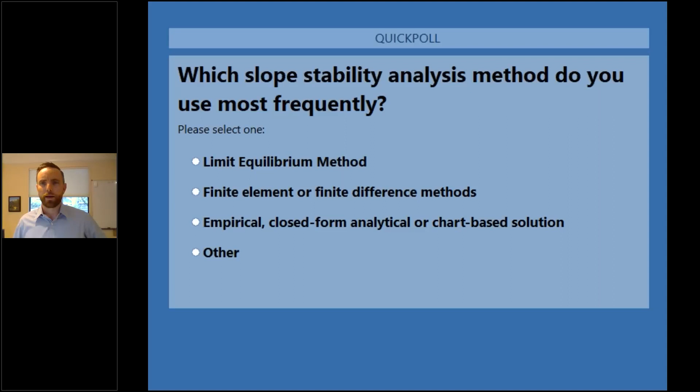And we'll advance it to the next question. Okay, thanks. So we got close to 80% of the people selecting that they use the limit equilibrium method most frequently, and then another 15% some type of continuum numerical modeling. So that's good. What I'm going to talk about today is directly applicable to the first method there, but as you'll see from our software presentations, it's also broadly applicable across any analysis method.

All right, we'll go to the next one here. What type of slope stability analysis do you use most commonly? 2-dimensional, 3-dimensional, or one of the other options there?

All right, good, thank you for voting quickly there. We got 95% of people saying they're doing 2D. So we're still seeing a relatively small percentage of analyses done in 3D. We got one person doing 5D analyses, so we'll look forward to hearing from you on the details of that during the Q&A session.

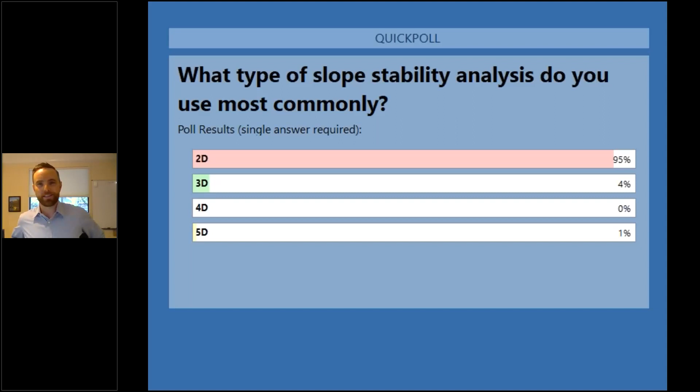Okay, 2 more questions, hang with us here. What methods of slope stabilization do you commonly design or construct on your projects? I believe you can select more than one option here. So whether you're an engineer doing design or you are out building these things or involved in the field, which are you most commonly implementing?

All right, so it looks like we got a fairly even split between a little bit of everything, all these technologies being implemented, and then even something else, other. Okay good, so that's informative.

And then the final question is related directly to what I'm going to talk about, and the answers are a little wordy, so bear with me. When you're doing limit equilibrium method analysis, which most of you indicated is what you're commonly doing, how do you represent deep foundation resistance in the model? So you can go ahead and read through each of those and select the one that's most appropriate, or choose other.

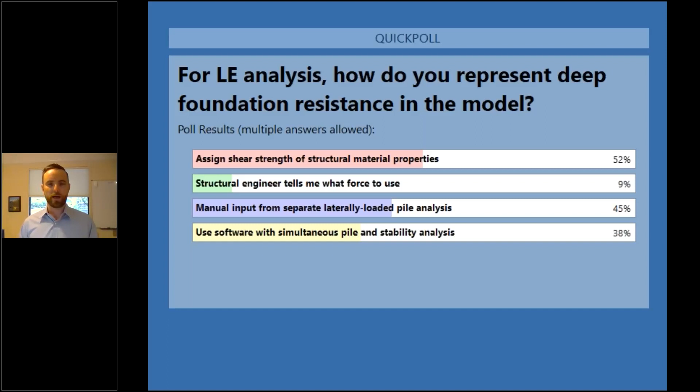Slightly more than half of you indicated that you are assigning the shear strength of the structural material, be it concrete or steel, directly to some slice in the model or some geometric zone. You could select more than one option here. About half of you are saying you manually input it from a separate laterally loaded pile analysis. Some of you are relying on the structural engineer for guidance, and close to 40% are using software that can do the slope stability analysis and a pile analysis simultaneously. That was the last poll question, and I think this information will be useful for our software vendors and for all of us on the organizing committee. Thank you for that input.

My presentation is called Incorporating Deep Foundations in Limit Equilibrium Slope Stability Analysis, AKA do not apply pile shear strength to material zones. That's a little tongue in cheek, but directly related to the last poll question. What I hope to highlight today is that this can often be an erroneous method of approaching a slope stability analysis that includes deep foundations, because it doesn't address the true mechanism that might develop. I'm going to explain how to identify that mechanism and correctly implement the force, and then our software vendors will explain how they did this for our example problem with their respective software packages.

My presentation is broken into two parts. I'll talk about the fundamental mechanics of the deep foundation resisting elements, which I'll refer to generically as piles—it could be a driven pile, a drilled shaft, or some other novel deep foundation element. Then I'll explain the problem statement given to the software vendors and the baseline information, so each of them doesn't have to spend too much time going through it.

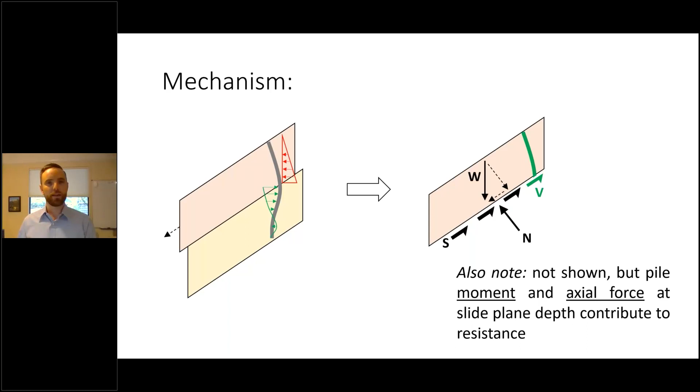I also want to point out that I'm only showing shear, and I'll talk about the mobilized shear force during this presentation. But what's not shown, and what you know from analyzing piles, is that if you make a cut, there's also an axial force in the pile at that depth if there's a component of vertical ground motion, and there's a moment. The same principles I'll discuss apply to those forces, which can and should be included in the slope stability analysis when computing force or moment equilibrium. But we're going to focus on the shear force here today.

So that's the shear force by inspection that acts on the free body diagram. The question is, what is the value of that shear force, the appropriate value to use in a slope stability analysis?

When you're doing limit equilibrium slope stability analysis, by definition, all components of the system are at a limit state. That's what limit means in limit equilibrium, meaning they have provided or mobilized their full available strength. For the ground, for example, it's at its shear strength. We don't directly consider the amount of strain it takes to get to that point; we just assign the shear strength as a stress or a force.

Likewise, when you incorporate a pile into a limit equilibrium slope stability analysis, my opinion is that the resisting force should be representative of a pile-soil interaction limit state.

Now there's a few caveats related to how we combine a factor of safety with the slope stability analysis and apply that also to the pile resistance. When the pile's at a limit state, you could choose to apply a resistance factor or a factor of safety, depending on what design framework you're working in—allowable stress design or LRFD—to that resisting force before you bring it into the slope stability analysis. Or you could allow the slope stability program to apply the same factor of safety that it applies to the geomaterials to the pile. That choice is yours as a designer. It can be handled either way, you just need to be aware of what you're doing.

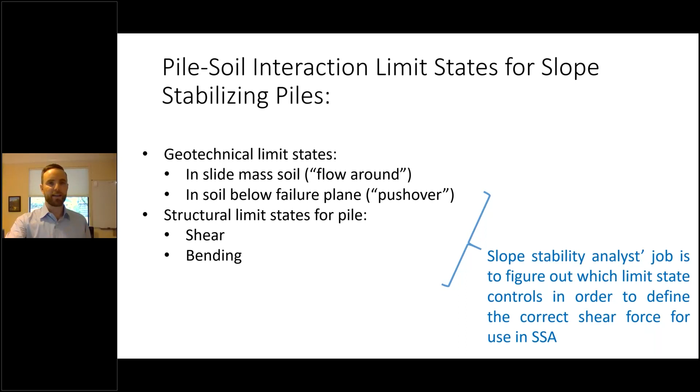So your job as the slope stability analyst or engineer doing this analysis is to figure out which limit state controls in order to define the appropriate force to implement back in the slope stability analysis. Let's look at each one in more detail and determine how you would identify whether a particular one is the controlling mechanism.

The first is the so-called flow-around failure. There's a maximum amount of load or stress that the moving ground can transfer into the pile before essentially a passive wedge or mechanism develops, and there's not going to be any more load transfer—the soil's just going to flow around, as the name implies.

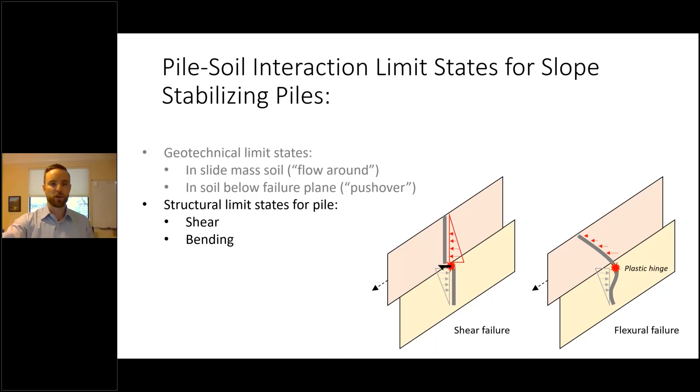The motivation for this presentation is that a method commonly employed, that I've seen over and over again, is that people jump straight to assigning the structural shear strength of the pile element as the resisting force. For example, say we're talking about a reinforced concrete drilled shaft. You could take the shear strength of the concrete, multiply it by the cross-sectional area of the shaft, and say that's its shear resistance, maybe adding in some shear strength of the reinforcement as well.

Or if it's steel, you take the cross-sectional area of something like a steel pipe or an H-pile, multiply it by its shear strength, that gives you a force. If you implement that in the slope stability analysis, you are implying that that's the mechanism that develops first before any of these others do. As you'll see in the next slides and in our software example, that's unlikely to be true for the vast majority of cases. It would be incorrect to do that, and potentially a drastic overestimate of the amount of available resistance, overestimating the factor of safety or stability of your slope if you use this method.

So let's dig a little deeper and question: is it possible to get a pile shear failure before one of these other mechanisms develops for typical conditions? If we have a shallow depth of sliding, particularly in soil, the maximum load imparted from the moving ground against the pile is unlikely to be enough to shear through the pile, basically.

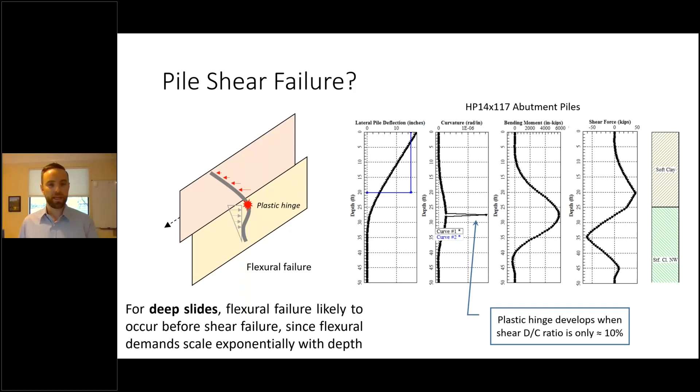Okay, so here's what I would propose is an appropriate method for determining the amount of resistance to incorporate back in your slope stability analysis. The bottom line is you have to do, one way or another, a laterally loaded pile analysis.

So one way to do that, if you use a limited equilibrium slope stability program that doesn't have that functionality built in, is to do a separate laterally loaded pile analysis, for example using LPile or equivalent software, where you make a model that matches the ground conditions. You've identified a depth of sliding from your slope stability analysis that you want to evaluate, and you set up a model like that, which you'll see in our software vendor examples.

And you displace the ground relative to the pile, and you track the mobilized shear resistance, but you're also looking to identify which mechanism is realized first.

So these next series of slides basically just detail the same thing I've already explained. You'll have these slides as a reference for how to go through this process in more detail.

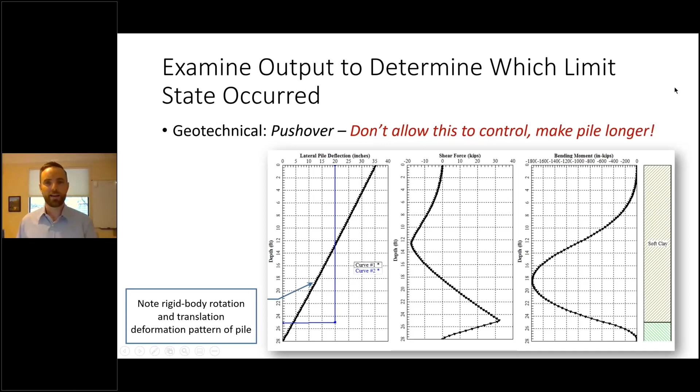Essentially, you're just going to track if each one of these mechanisms develops. Do you have a flow around failure? Do you have a pushover failure, as exhibited here by this rigid body rotation that goes to a large displacement? In that case, just make the pile longer. If this is occurring, you shouldn't let it—you should just make the pile longer. So that's an easy fix.

Or are you getting a structural failure, which of course requires you to have knowledge of the nominal moment and shear strengths of the section? So there's no way to do this without doing the laterally loaded pile analysis and also having an actual trial pile design in mind from which you can calculate its structural strength. There's no way to do it otherwise.

So if you're thinking you can do this purely in the geotech world, as in the slope stability software, unfortunately you can't. You need to work collaboratively with a structural designer, or have that capability yourself.

Okay, just to really point out a few more things that would be incorrect ways of doing this. If you draw zones in your model geometry that represent the pile, and you assign to that slice the structural shear strength of the pile material—like, for example, if it's concrete, and you make a Mohr Coulomb model where the cohesion is set to 5,000 PSI because that's the strength of your concrete—you are not doing this correctly, because limited equilibrium slope stability software is not set up to do a lateral pile-soil interaction analysis.

So you might think you're doing it right, but basically you're skipping that part of the analysis, and could be off by a big margin.

I'll say that a lot of slope stability software—essentially all of it, in my experience, all the different programs that are available—give you a way to directly input the structural shear strength of a pile. And in that regard, I won't say they're misleading, because all programs require the user to understand what they're doing, but they sure make it easy to do this in what I'm describing as the wrong way, to just input the shear strength of the material.

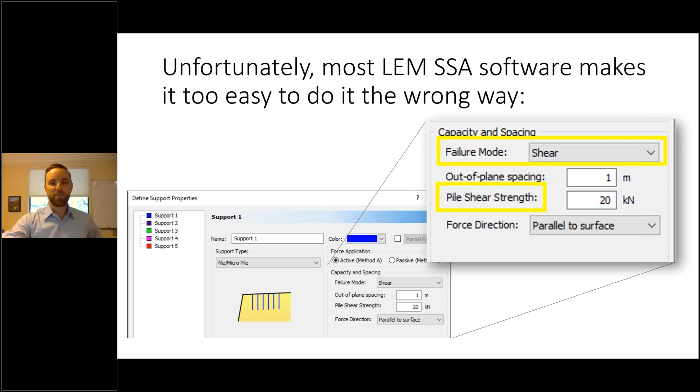So be wary of that, and be aware that you need to perform a separate analysis to determine what that force is. Even though I've been talking about limited equilibrium analysis, you don't get off easy just because you go to a continuum numerical modeling approach.

The same thing applies. You can't simply define zones of geometry and then assign a constitutive model that represents concrete or steel, for example, to those zones and think that you're done.

You have to take care to set up your numerical model in a way that actually represents the pile-soil interaction. Typically, that's going to mean you need to implement structural beam column elements to represent a pile, and also define the interface between the pile and the ground to make sure you're capturing that interaction behavior. So you don't get off easy by just going to that type of analysis.

Okay, some final thoughts to wrap up the mechanics part of this presentation. The bottom line is that shear failure is unlikely to occur prior to a flow-around or flexural failure in most of the scenarios I've looked at. It is possible to get a shear failure in a pile, particularly if you're going through rock where the slide plane is between boundaries of rock, like a bedding plane of a sedimentary deposit—you can shear through a pile before failing it in flexure. But for the vast majority of cases, it's usually wrong, and therefore unconservative, to apply the pile shear strength to material zones in slope stability analysis.

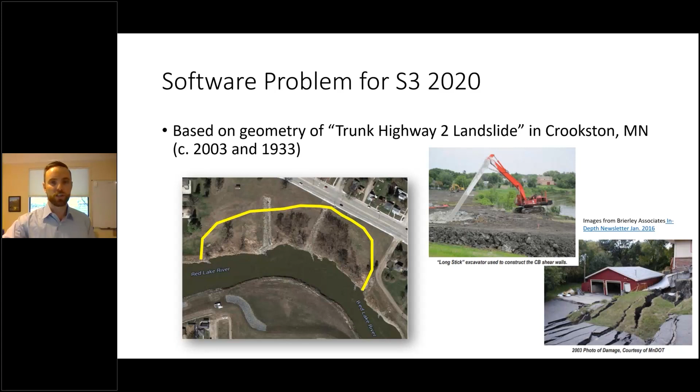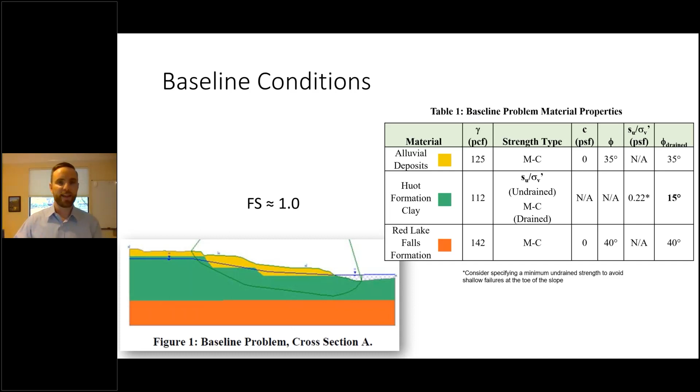For the problem at hand, we didn't include any changes to the ground surface elevation or changes in water levels, so it's that long-term drained property that applies. It's also worth pointing out that we provided a simple hydrostatic groundwater surface, even though in the real landslide, as detailed in the Barr report, artesian groundwater conditions and a rapid drawdown of the river level were actually attributed to the landslide. But we simplified that because we're not diving into the details of water in slopes.

Here are the prompts that the software providers were asked to respond to in their presentation. The first one is just to identify what factor of safety they computed for the existing conditions, to make sure we're all at the same starting point.

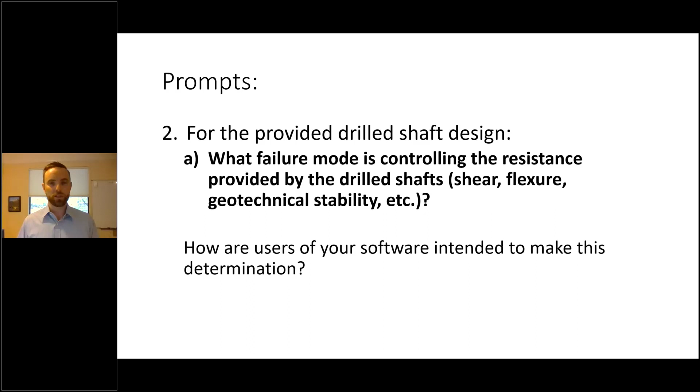The second one is we wanted them to identify what failure mode is controlling the resistance provided by the drilled shafts - shear, flexure, or geotechnical stability. We want them to identify what controls, and then tell us as users or potential users of the software how they made that determination. That was part 2A, and the remaining ones are more nuanced and relate to the subjects they'll go into detail about.

So what is the computed stabilized factor of safety with the drilled shafts as specified? What are the demands on the drilled shafts that should be used for structural design - shear, moment, and axial demands? Part D: what amount of slope displacement is anticipated for the safety factor computed in part B?

So if you're telling me the safety factor is 1.4, what displacement goes along with that, and what is the meaning of that displacement? And then the last part: what amount of slope displacement is actually anticipated? If I go out there and build these drilled shafts like I just showed, how much is the ground actually expected to move?

And then I weighed in here with my own opinion - for example, in the context of a limit equilibrium analysis, this might be associated with a factor of safety of 1.0, or referred to in the context of 'service level displacements.' So you'll hear more discussion of that from the providers.

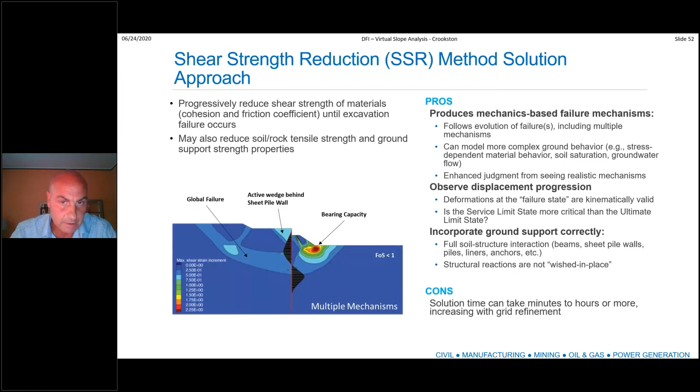In terms of mesh generation, again, Flac3D comes with an extruder. It's very simple—you just import a background image, decide what mesh density you want, and in less than a minute you have the mesh. There are other options, but I'm not going to talk about those for more complex geometry right now.

Okay, this is enough—we already shown this section. Let's get started with the analysis.

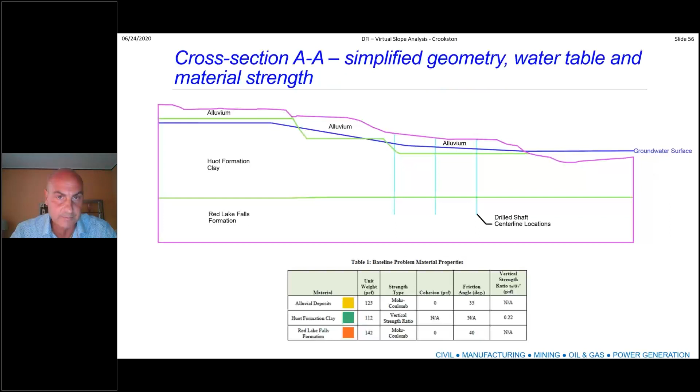This is just a summary of what Ben has already shown—material property and geometry.

One decision we have to make, especially in this circumstance, is that we have to start imposing a stress and do a back analysis to bring the slope into a failure condition. So we have to decide if we are basing our analysis on the post-failure geometry or pre-failure geometry. I decided to concentrate on the post-failure geometry. It provides a slightly different shear failure location, especially close to the highway, but for the purpose of this exercise, I decided to stay with this one.

In terms of constitutive model, I use Mohr-Coulomb for the clay and the upper sand, and plastic hardening for the till. This is the water table location, and this arrow that you see is just the total pressure applied at the bottom of the river.

In every numerical model, we have to initialize the stress in such a way that the model can reach equilibrium. In this case, for example, I applied an undrained shear strength of 0.25 sigma prime V with a minimum of 15 kilopascal. Otherwise, we would have seen a local mechanism that is meaningless.

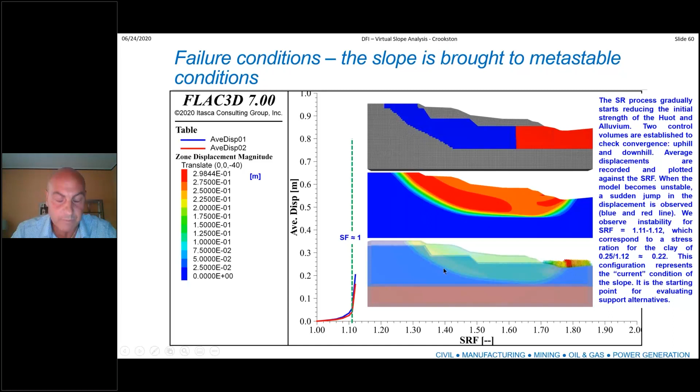Now we have brought the model into a metastable condition, which represents the situation before installing any type of support. Now we are ready to install the support, and this is the first solution, the basic solution that Ben described.

So we have the three drill shafts on the left, the alternative with embedded pile, and on the right, the alternative with 3D solid piles. I also included all the reinforcement inside the steel cages, in terms of longitudinal bars and also the spirals. Now, what do we get?

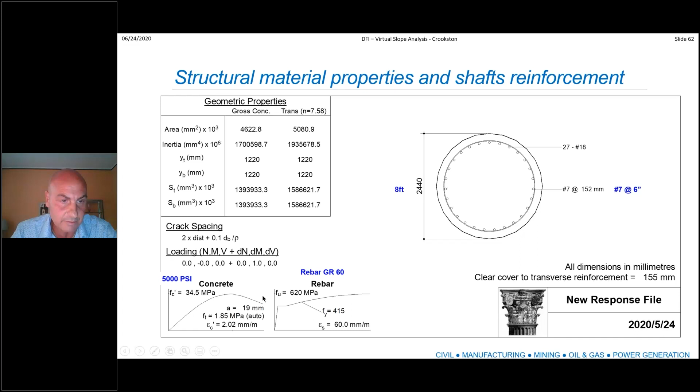This is just a cross-section representation of the structural layout with the constitutive model for the material in terms of concrete and steel. I'm not going to talk about this in detail. What the sectional analysis gives us are usually three aspects.

One is the thrust-bending diagram. Second is the moment curvature, and third is the axial-shear diagram. All of this nonlinear behavior has been implemented inside FLAC3D.

So while the strength reduction process goes, we know when we reach cracking in the pile, we know when we get into ultimate failure, and we know if we have shear failure or bending moment failure, and we also know what type of geotechnical failure, if any, would develop during the process. So essentially, we have the full picture combined together in the model.

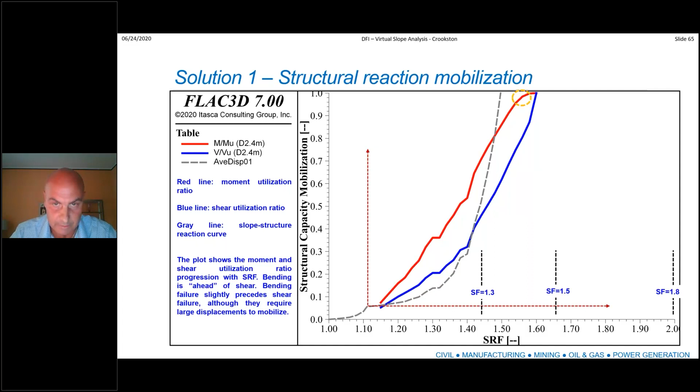But again, at safety factor 1.5, we have the full structural mobilization in terms of steel capacity and also concrete capacity. You can read in more detail below that slide. Okay, this is showing the mechanism for the pile in this case.

Next one should be a short video. Hopefully I can get it started. That would show how the mechanism would develop.

If you follow the blue and the red line, that shows the mobilization of the displacement for the slope. You see that the lower part is gone at around 1.3 something, and the blue line keeps going because that is the portion of the slope that is pushing against the pile. You see how this pile is displacing until we get the structural failure. Note that below 1.5 we have a displacement that is higher, if you look at the red portion of the picture.

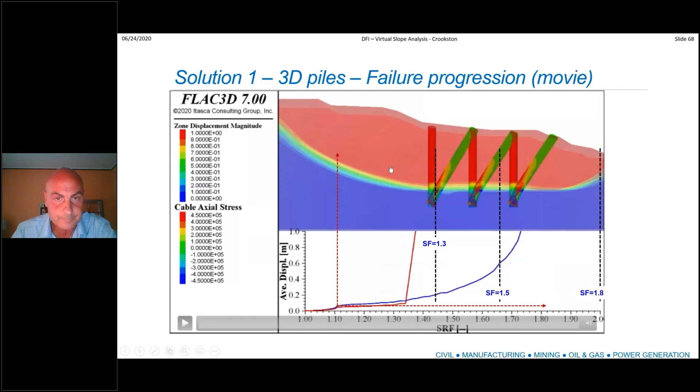Next, let's see what happens if we embed the piles 4 diameters instead of 2. We get a little bit better performance, but not really much. We still are not able to get to 1.5, and the displacement is still significant. So this is certainly a solution, but it's still based on a cantilever system.

Now we are embedding more, and so obviously what I would expect is to have an even more pronounced gap between the bending mobilization and the shear mobilization. This is actually what happened. If you remember, with the 2 diameter embedding, the red and blue lines were kind of traveling together, while the longer the embedment, the higher the bending mobilization is.

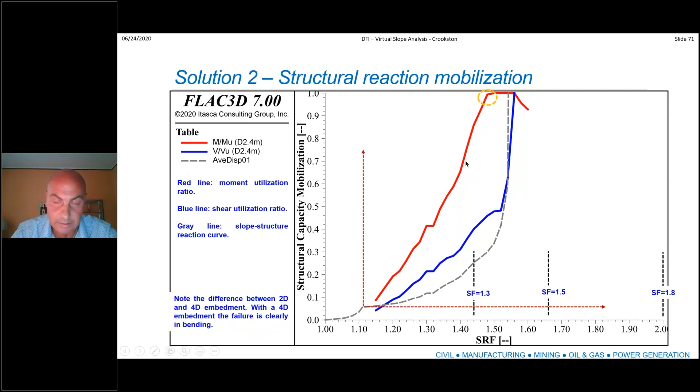What would happen instead if we change the static configuration, like for example, adding a top beam? So instead of relying on a cantilever cross section only, we would transform the support into a frame. This is highly beneficial. We are reducing the displacement significantly. We are also changing where the bending moment and the maximum bending capacity or demand is localized. Now it's at the top, close to the beam, which can be accessed much more easily than having a plastic hinge down at the bottom, and we can go up to 1.5 with a displacement that is still probably acceptable for a state limit.

Obviously, it doesn't solve this situation. This is a point that I want to make. Sometimes I've seen people say, okay, I don't care about this mechanism, I'm going to ignore it, and just put a high cohesion or something like that. In reality, it is like putting in ground improvement. We will see that taking care of this wedge in the other solution is actually improving the performance of the slope as well. So everything is kind of cooperating together. Multiple mechanisms and structural organization must be analyzed together.

This is just the curve of the displacement and the deformed shape at failure. The failure is in bending again, and it is located at the top connection with the beam.

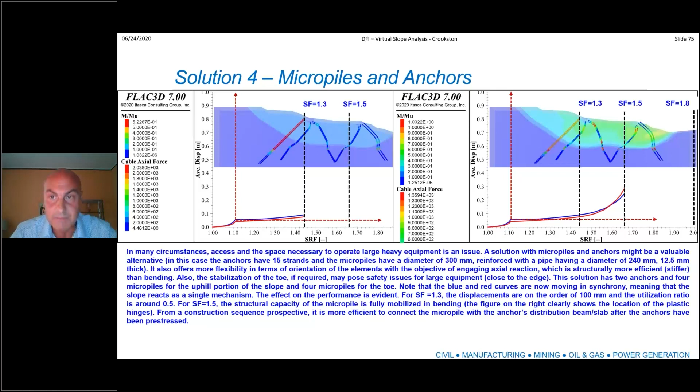It's not always possible to do this type of approach. Here, bonding, the bond and the ground bond, becomes a significant issue. So the control and execution also become important. But just to show the difference in terms of performance that you can get switching from drill shaft, in this case cantilever, to adding a top beam, or to switching completely toward axial control type of mechanism, we can go above 1.6 or even higher.

Finally, and I'm almost done, of course the mechanism here in terms of structural behavior is controlled by bending. The micropile will break in bending. The shear here, the green line, is almost not even registered.

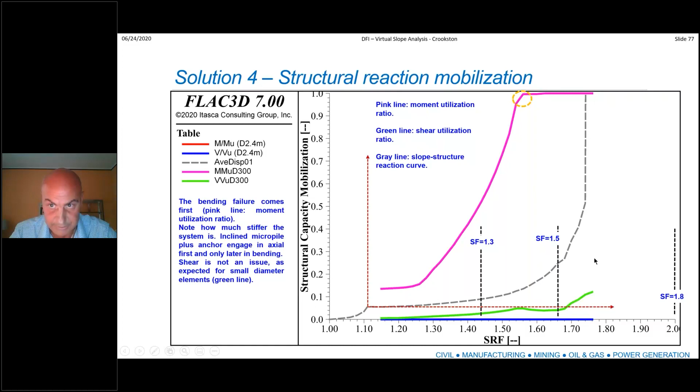Just for your information, these are the properties of the micropile that I've used. I don't need to get into this detail, we can quickly move forward.

This is a combination of different systems. I kept the drill shaft here, and also put micropile here as support and anchors in the situation. So this is a mix of different types of approach.

Try to block the head of the drill shaft instead of leaving it as a cantilever, having a system that can control the horizontal deformation. This actually works pretty good and seems to be the best one, and would allow also optimizing the diameter of the drill shaft.

I didn't do that because of time, but in theory, this solution would allow for reducing the diameter and the reinforcement of the drill shaft.

We see that we can easily get a safety factor of 1.8 with this one, and still the performance is very desirable, because we are talking about only a few inches of displacement.

Finally, since I did also the analysis for the shear wall, I was curious to see where the shear wall solution stands in this situation.

Consider that this approach is based on undrained shear strength, and for the design I didn't use the undrained shear strength, but an effective stress approach that I will mention a little bit later.

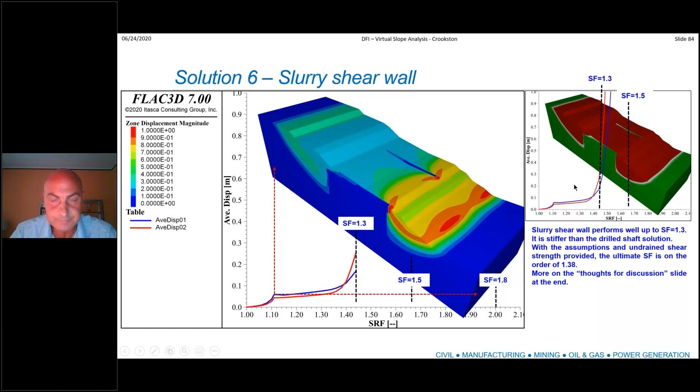As Ben was mentioning, the shear mechanism is brittle. We get a better performance before we get to failure, but once it fails, it goes pretty fast.

Finally, I guess it's important to summarize in such a way - this is a kind of busy chart, but bear with me for a second - this is the summary of all the solutions that have been analyzed in a single chart. It's kind of easy to track what we want to get and what is the best solution we can implement.

Considering the safety factor, which is only a number and usually doesn't really represent the whole system if we don't associate a level of displacement to it, a level of performance. A safety factor means we know only the final point, but we don't know how to get from point A to point B and what happened to our support system along the path.

So, for example, if we fix 300 millimeters, a foot of displacement, as a maximum displacement that we can tolerate, and we wanted to have a safety factor of 1.5, we see that none of the solutions based on piles, and even the shear wall with this situation, would satisfy this requirement.

We need to put at least a capping beam at the top, or a similar system, and try to control the head displacement. Even with a closer view close to the origin, if we want to go into a service limit state...

we see that all the piles, including the 2D analysis, are kind of moving in parallel at relatively low displacement. We see that the shear wall is stiffer, obviously, in this situation, but the solutions with axial mechanism are performing better than the others.

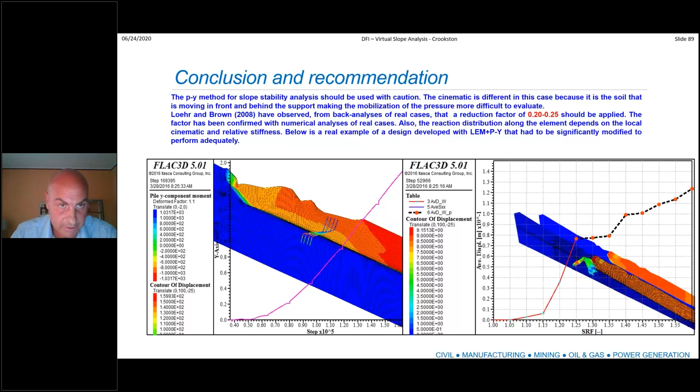Now I want to discuss the limitation of the general approach. I'm struggling to understand the physics of reducing the strength below a minimum value, like the normal consolidation value or the residual strength. There must be a limit in terms of strength reduction below which it doesn't make sense to keep reducing. Here we were already in normal condition, so how can the strength be much lower than that? It could go from 0.22 to 0.20 or 0.18, and that's fine, but it certainly cannot go down to 0.10.

So all approaches probably need to be rethought and reconsidered. This is why I tend to use an effective stress approach, because I think it is more appropriate for this type of slow movement and stability analysis.

In this case we had good data from a triaxial test. You see this graph on the right - the red dots illustrate the peak strength, and the blue dots the residual strength. Without doing any fancy math, I drew a gray line representing the peak condition or undisturbed shear strength, and a very conservative assumption for the minimum residual strength, which I assume as the design shear strength.

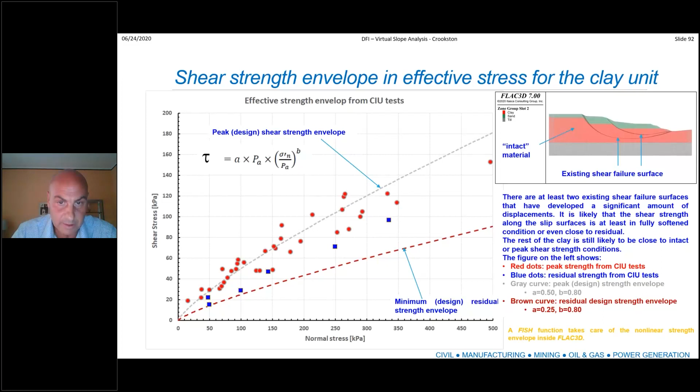This is exactly what I did: start with a model initially in equilibrium, reduce the strength only on the existing slip surface, and the failure happens for a shear envelope very close to the residual - and 0.28, 0.25 is pretty much the same number. So we have these two sliding slip surfaces at residual, and you see this jump in displacement representing failure.

At this point we install the support and keep reducing the analysis - reducing the strength everywhere now, all the way down to residual in the slip surface, and also in the till formation and in the top sand.

Here's what we get: the global strength reduction can travel all the way to residual, and we have a mobilization of 0.44, close to 0.5, which in my opinion means we have already applied a safety factor of 2 on the geotechnical side, and a safety factor of 2 on the structural side in terms of bending moment. We already know the shear doesn't come before the bending in this configuration.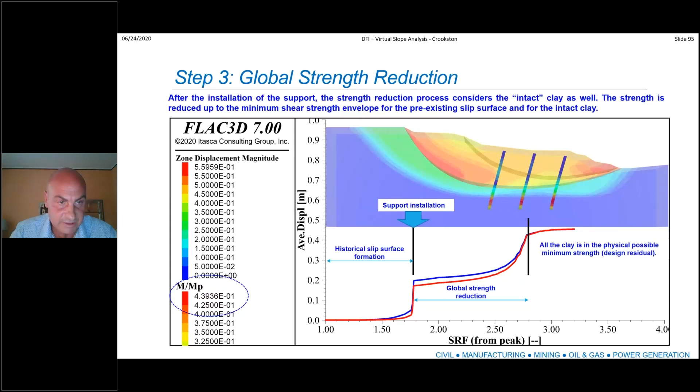So what I'm trying to say with this approach is that sometimes just relying on drained shear strength and reducing it to values that are not physically possible can produce unrealistic designs.

I did the same exercise, a two-way conservative design, with the shear walls, getting very similar results. What I'm showing here is the formation of tension and shear bands - mostly shear here and tension on this side. But again, we have a safety factor of 2 in comparison to the residual strength.

I guess I'm approaching the end. This is the method I tend to use all the time when I have a pre-existing slide: trigger the residual strength or close to it. If you don't have data, Professor Stark's correlations can provide initial information to determine the A and B parameters for fully softened and residual strength. Then install the support and reduce the strength.

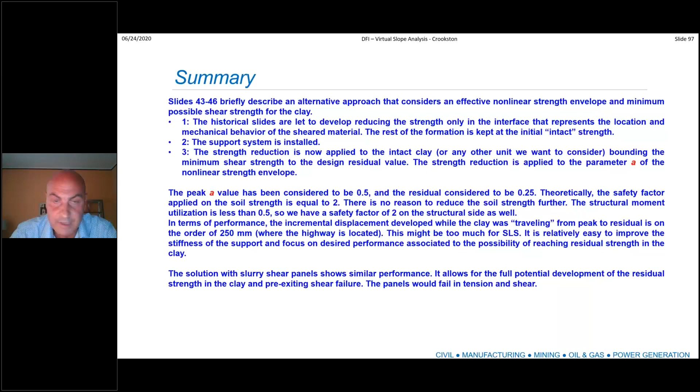Once you are at the lower limit, you can still play with other problems like water table or creep, or any other phenomenon that you think may happen, in order to evaluate the performance of your system. And that's the end - thank you for your attention.

All right, thank you, Augusto. Lots of detail in there. Just a reminder that the slides will be provided as a PDF, and certainly the presentation we just saw will be a valuable resource to revisit. Lots of extra commentary and discussion on the details there from Augusto was included on the slides. I think also he made some sage points about the relationship between factor of safety and displacement or performance, and that it can be misleading to just think about slope performance in terms of a factor of safety, which is, after all, a number that represents a theoretical condition that doesn't actually occur.

Okay, our next presentation is from Dr. Gary Gregory, and we'll see a different approach of looking at this same problem. Professor, go ahead.

Well, thanks everyone for joining us today. My presentation is based on a combination of limit equilibrium and P-Y analysis, using my slope stability program GEOSTASE and Ensoft's lateral pile analysis program LPILE. This is a very simple and rational approach that is well within the capability of most geotechnical offices with experienced geotechnical engineers, and it's worked well for me over the years. I'll also have a technical memorandum covering more details that I can provide, and perhaps it will be included with the PDF later.

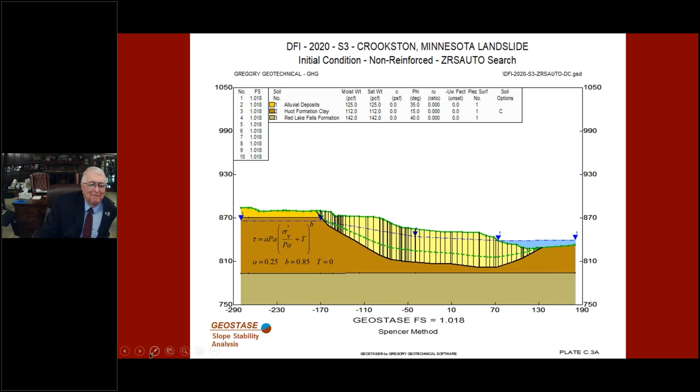So then I analyzed again, using the ZRS auto approach and using the curved strength envelope to represent residual, but installing the 3 rows of drill shafts or piers. Then I got a factor of safety when I applied, in this case, 14,000 pounds per foot in the out-of-plane direction, rather than initially assigning it to an individual pier, because most of the time we may not have the size of the pier, the spacing, and that sort of thing to start with.

So it's easier just to assume a per linear foot force in the out-of-plane direction. Then when the pier spacing and arrangements are determined, that can be expanded to a per-pier force. But in this case, we already had the piers defined at the 24-foot spacing, and I iterated the force until I got a factor of safety a little above 1.3, which I felt was probably a minimum factor of safety we'd want for this condition in the limit equilibrium analysis.

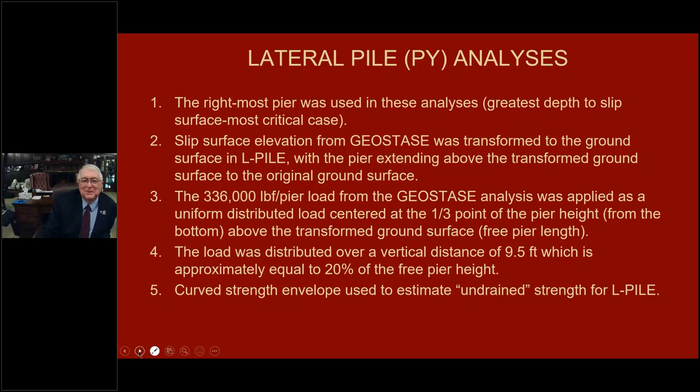So this is a diagram of how I set up the model. This, which is a ground surface in LPile, is actually the slip surface in GEOSTASE, the limit equilibrium analysis. So we're going down to the slip surface and extending the pile above the transformed ground surface up to the level of the original ground surface in the LEM analysis.

Then the 336,000 pound force is distributed over the 9.5 feet vertically and centered at the third point.

I noticed in the analysis, I first ran it with 2 pier diameters of embedment, 16 feet. However, it looked like it was approaching a pushover analysis with the p-y curves I was using for the weak rock. So I felt it was prudent to extend it another half diameter, to 20 feet, or 2.5 diameters.

Now some of the rationale for this model is that, first, we see a lot in finite element analysis that the soil pressure on the upslope side of the pier is not, in fact, a true triangular pressure. It's more centered with a stress bulb around the third point of the height above the slip surface. So I believe that more correctly models the load on the pier.

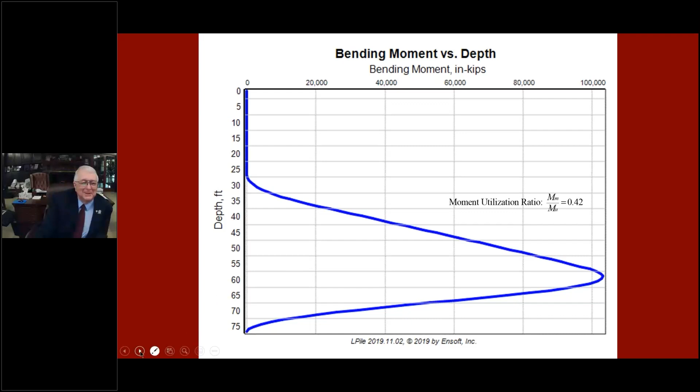And the maximum shear is about 800,000 pounds, just a little less. If we look at the shear utilization ratio, and both of those combined, considering them in one term, I call it the structural utilization ratio. So in this case, the shear is about 0.41. Again, if we had used the allowable shear, our factor of safety would have gone way up, but our displacement would have been much greater.

So if we take a look in conclusion, if the stabilization had been designed on the basis of the allowable shear of the piers and limit equilibrium analysis only, a large factor of safety would have been indicated. But if the slope moved and actually loaded the piers to even half their ultimate shear strength, the system would have experienced a functional failure due to large deformation.

And that is what Ben alluded to initially. If we just calculate the shear capacity of the pier and plug that into our limit equilibrium analysis and achieve a factor of safety, we're totally overlooking the other three mechanisms, which would be the shear, the moment, and most often the one that controls is displacement.

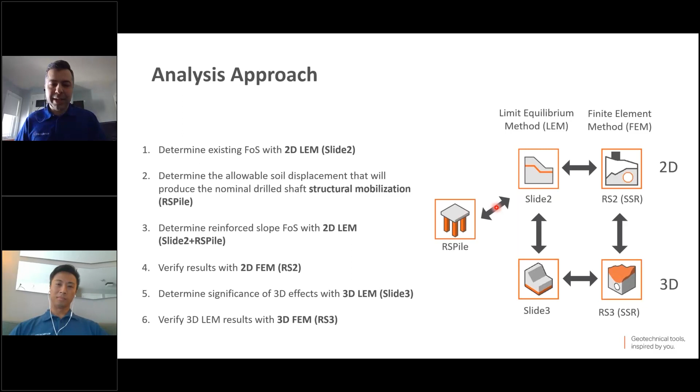Let me introduce these software packages a little more. This is Slide2, our 2D limit equilibrium slope stability software. Basically, you can do any type of 2D limit equilibrium analysis, including support analysis. It has one additional finite element engine to do transient seepage analysis, and we can also do any type of statistical analysis, including advanced spatial variability analysis, which I developed for the Slide software.

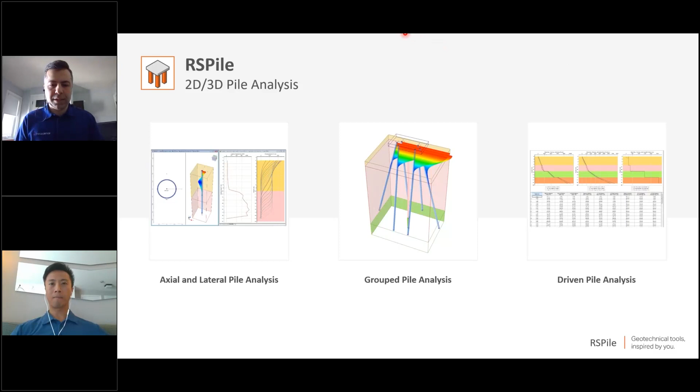Next software is RSPile, which we're going to use together with Slide. RSPile can be used for 2D and 3D pile analysis. You can do axial and lateral pile analysis, group pile analysis to design caps even, and driven pile analysis, all in one software package. You don't have to have separate software packages for each type of analysis.

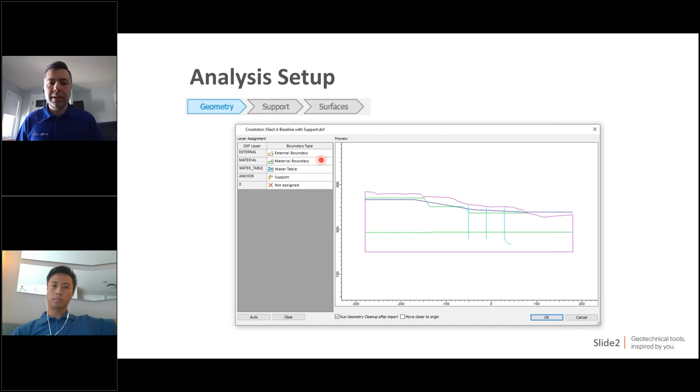Going back to our modeling procedure: we had the DXF file, this is from the Slide software. We imported the DXF file into Slide. You can see that in Slide, you can define the external boundaries, material boundaries, water table, and supports from your DXF file. After importing this into the software, the next step is to define your material properties.

As explained, we have 3 different types of material. The case we are studying is a long-term drained material. We use Mohr-Coulomb for each of these materials. For the limit equilibrium method of analysis, we use Janbu and Spencer.

The reason we use these two: first, Janbu is a simpler method and it's faster, and it tends to give the lowest factor of safety among other methods, so it's good for checking purposes. Spencer is a more rigorous method, and we always recommend using Janbu and Spencer together for the analysis.

Next is to select the search method, which you can use to find the critical slip surface. This is an important part of the limit equilibrium analysis. The traditional methods are circular methods, but nowadays for more complicated case studies, these methods don't work properly, so you need to go to more advanced methods.

As you can see, our non-circular library is much more than our circular library. We just keep the circular method for traditional purposes.

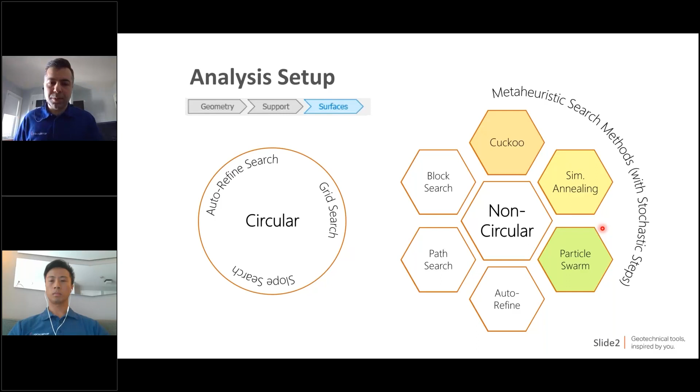In our non-circular analysis, we have advanced methods called metaheuristic methods. Cuckoo search, simulated annealing, and particle swarm are our metaheuristic approaches. On top of these non-circular search methods, we have our in-house local optimization, which is surface altering optimization. The combination of these two is going to help make sure that the critical slip surface you find is the lowest, weakest failure path.

And how can we figure this out? We compare the results with finite element analysis, and if you get the same answer, it means you used the proper search method, which we're going to show you today.

So we did the analysis. First of all, it is not circular, as you can see - this is a non-circular critical slip surface. For the drained case, we got the factor of safety using the Janbu method of 1.02, and for Spencer, 1.11. As I mentioned, the Janbu method gives a lower factor of safety, which is a good check.

These are all the slip surfaces, and this is our critical slip surface. We can filter the slip surfaces to the ones that are more critical, filtering the sliding surfaces with a factor of safety of less than 1.5. You can see this is the failure band, and the actual failure surface is within that failure band.

So after finishing the non-circular unreinforced analysis, we're going to move forward to the reinforced case, and Jeff is going to continue the presentation.

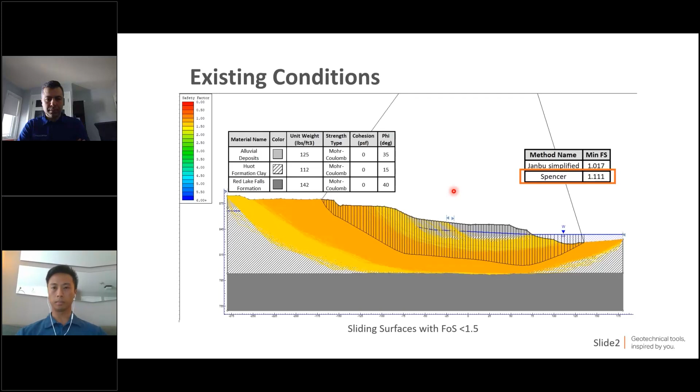Thanks, Ina. I will be covering the 2D integrated slope stability and pile analysis model here and over the next few slides. After we are satisfied with our unsupported results, the next step is to set up our Slide2 model with the reinforcing elements using the provided drilled shaft configuration.

Then we set up the lateral pile analysis using RS Pile with the provided P-Y parameters and pile parameters. We went through the exercise of checking the structural mobilization along the pile length versus a range of soil displacements, just to see how much the pile can handle. Once we have this number, we iterate it through our slope stability analysis with that pile displacement as our upper limit.

In order to determine the structural capacity of the pile, we use the ACI SP-17 procedure to obtain a nominal flexural capacity of 19,400 kip-foot and a nominal shear capacity of 1,964 kips. These numbers go into the denominator of the structural mobilization.

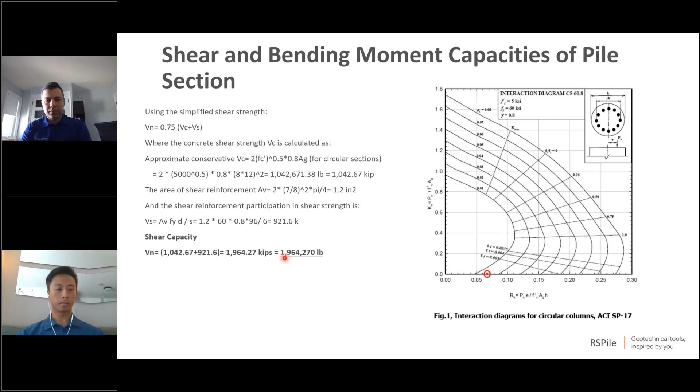The numerators are calculated in RS Pile along the entire length for the various soil displacements. We started off by using 1 inch of soil displacement, and RS Pile will automatically generate the lateral resistance envelope at that level of displacement.

We started with 1 inch because it is a common tolerable level of displacement that we've come across. But more importantly, it is within the range of displacement where we can expect to obtain realistic results. Higher displacements may fall into the category of large strain problems, and the numerical programs we are covering today are based on small strain theories.

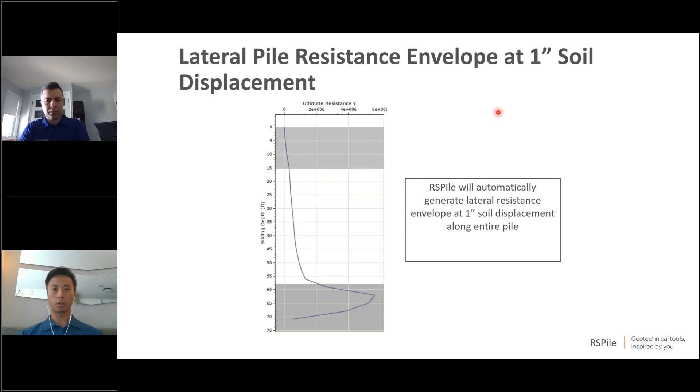So the corresponding structural resistance graphs are also automatically generated for each of the starting depths. Note that I did not look at the starting depths in RS Pile within this deeper hard till formation, because none of our critical slip surfaces go into it. So I left that part of the pile analysis out.

Checking the maximum structural mobilization at 1 inch displacement in RS Pile tells me that the maximum shear is developed at a depth of 56 feet. That number is 511 kips. Dividing that by the nominal shear capacity gives me a shear mobilization of 0.26.

The maximum moment is developed at a depth of 61 feet when the starting depth is at 53 feet. That number is 3,014 kip-foot. Dividing that by the nominal moment capacity gives me a moment mobilization of 0.16.

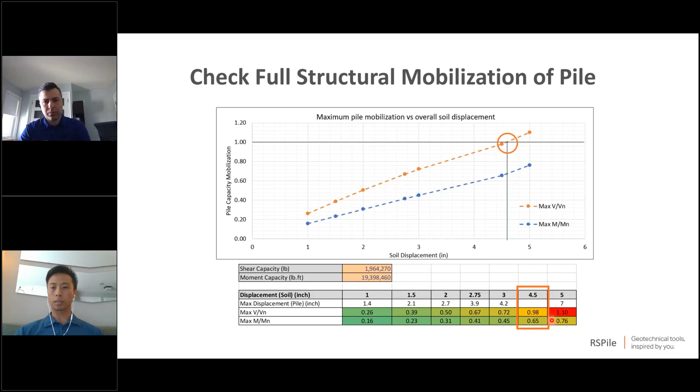So then I proceeded to check the structural mobilization with increasing soil displacement until I reached some sort of a structural capacity. And the conclusion from this exercise is that we can basically rely on the structural strength of the pile along its length up to a soil displacement of 4.5 inches, where it will fail in shear at a depth of 56 feet.

That depth is right above that much stiffer Red Lake Falls formation. It's also worth noting that it is unlikely that this amount of displacement will be called upon at that depth to stabilize the slope, but nonetheless, it's still a good exercise to determine the structural limits of the pile for our coupled analysis.

So next, we're going to show how we can integrate the results from RSPile into Slide to give you that factor of safety.

If you go into support properties in Slide 2 and go to support type, below where it says pile, micropile, below where it says soil nail, you will find a support type here that says RSPile. Basically, that's where you're coupling that lateral pile analysis with your slope stability.

Down here is where you will tell Slide which pile analysis file you want to point to. You also have the option to tell Slide which force application you want to use, the out-of-plane spacing, and the soil displacement. We're also going to go with the 1 inch case here.

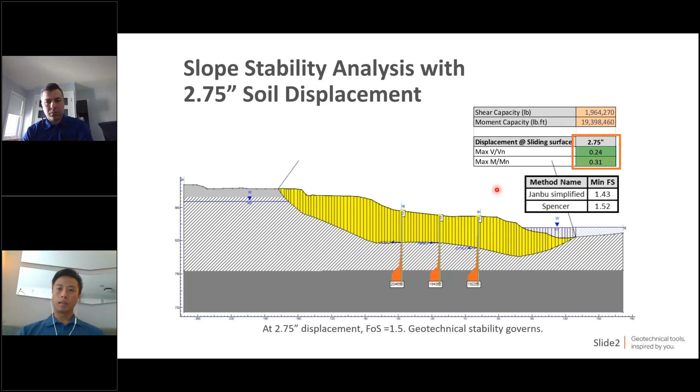I took it a few more steps further. I went from 1 inch all the way to 2.75 inch, and I kept loading up the displacement along the sliding surface until I reached the structural capacity.

As you can see here, as I load up the soil displacement, we are mobilizing more of that moment capacity than the shear, up until failure along the sliding plane at 14 inches, at which point we have 60% of the nominal shear capacity mobilized.

It's also worth emphasizing that this 14 inches is actually much larger than the displacement required to produce failure along a greater depth, compared to the 4.5 inches we saw earlier. So an additional takeaway from our Slide 2 and RSPile presentation is that it is possible the pile will fail at a lower amount of displacement at some other depth, other than the sliding surface we are kind of honed in on.

Best practice dictates that we check our results using another analysis method, so we used our 2D FEM software, RS2, to do that. It's a simple matter of taking the Slide 2 file and dragging and dropping it into RS2. The geometry is imported directly, and the program automatically generates the mesh, elements, water table, everything.

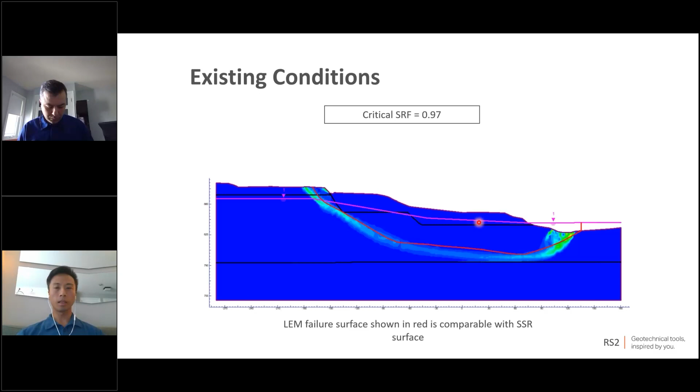Then you hit the compute button and start getting the first iteration of results. To check our unsupported case, we compare it to see if our unsupported results from the 2D limit equilibrium and the 2D finite element match. We see a good fit because we're getting a comparable factor of safety of 1, and the critical sliding surface is also very comparable. The 2D limit equilibrium surface is shown in red, and the finite element shear strength reduction failure surface is shown by the green band.

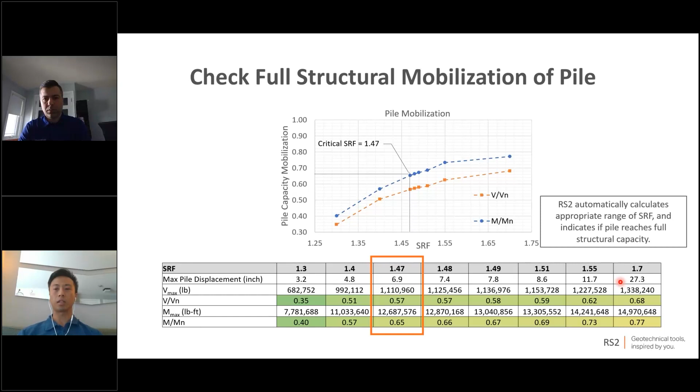So going with this, it is once again seen here that it is the geotechnical stability of the soil system that governs. We have these areas of localized soil that are failing.

The first parameter we require is the coefficient of variation of input parameters. In this problem, we assume the friction angle of the soil has 15% variability, which is a typical number. We investigated two different cases, one with spatial variability and one without spatial variability of soil properties.

To define the spatial variability, we required a parameter called spatial correlation length, which we didn't have for this analysis, but since we had CPT data, we could measure it. This is an algorithm written in Slide that's going to be released in the future, but we already had it, so we used it to measure the vertical spatial correlation length of each layer. For the first layer it's 1.8, the second layer 2.4, and the third layer 5 meters. These are just vertical - we assume there's no spatial variability in the horizontal direction, which is typical for most case studies.

Assuming these numbers, we defined our spatial field. So what is spatial variability? It means that your soil properties depend on the location of the soil property in the soil profile. Assuming the soil is homogeneous with the same value along the profile is a little too conservative. So we defined these correlation lengths for each layer - the blue regions are weak material, and as it goes to green and yellow, the material becomes stronger. So it's not homogeneous anymore.

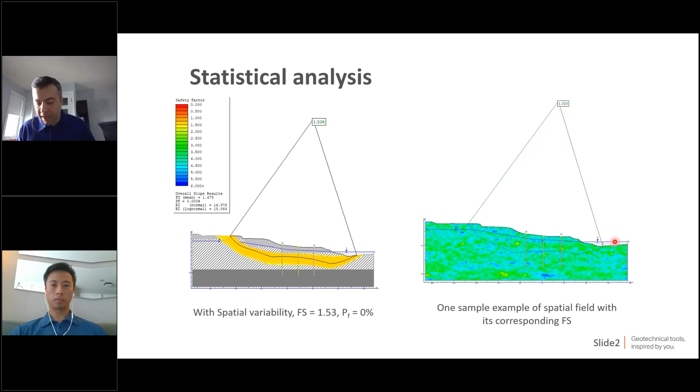So if I run the finite element analysis for this example, the same region is going to be found by the finite element analysis, which matches the result of limit equilibrium.

Then we moved forward to the 3D analysis. We saw in the polls that only a few percent of people use 3D analysis. Maybe I encourage you to do more with these examples.

So we used two different methods to create our 3D geometry. The first method: at the beginning, we had three sections in 2D, and we wanted to use these sections to create our 3D geometry. First of all, I did not extrude to create these sections into the 3D geometry. This is the actual 3D coming from three 2D sections.

So how it works: we use the 2D sections, and also we had some boreholes, and we defined some additional boreholes from our 2D profiles that we had. Combining these, we created our 3D geometry like this. So these are our 3D sections. This is one way of doing it.

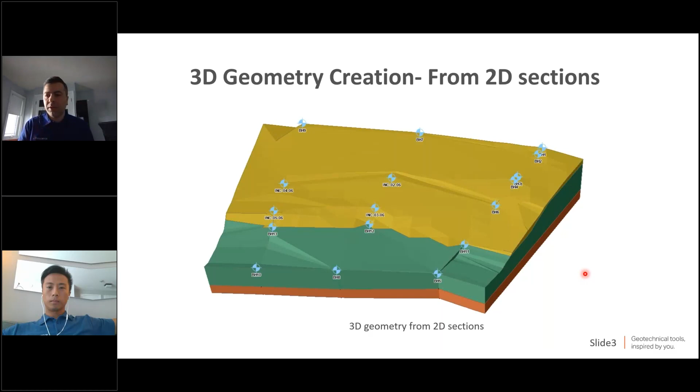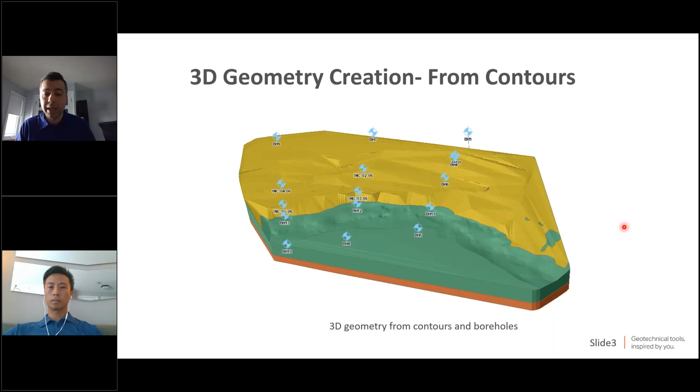After that, we got the elevation contours from the committee, and these are the actual contours of the profile. So this is another way of creating geometry. We used these contours and created a surface using them, and also used our boreholes to create our geometry. So this is the real 3D. This is not extruded, this is coming from the elevation contours.

So we ran the analysis for both cases. This is the case where we used the 2D sections to create the 3D geometry. You can see that for the unreinforced case, we got a factor of safety of 1.27. If we look at the safety map, you can see this is the failure zone, and as we go further, the slope becomes safer.

If you look at the results of the actual 3D coming from the elevation contours, you can see that the factor of safety is 1.17, which is lower than the case using 2D sections, because this one is more accurate. So the first lesson is: if you use the actual contours, you may get a different factor of safety, which is more realistic.

The second conclusion here is that between 3D and 2D, most of the time, not always, 3D gives a larger factor of safety. But how much larger? We don't know. It depends on your 2D section, where you cut the slope. It depends on your type of geometry, and depends on how you create your 3D geometry. So all these are factors that affect the factor of safety.

It can change from 5% to maybe 20%. I haven't seen something like 40% changes, but maybe if you extrude or do something, you get 40% changes. Normally, though, it has a lower range.

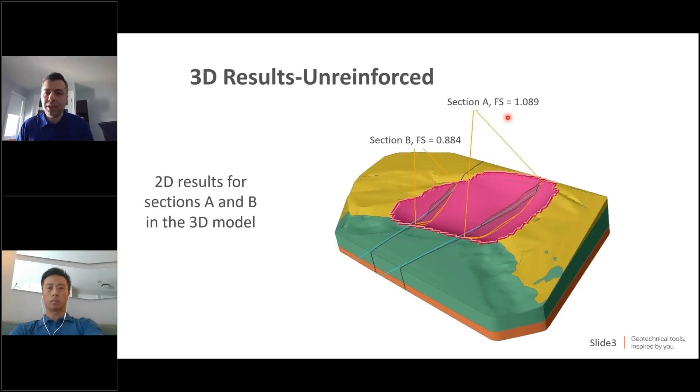So what happens, what is the difference between our 2D and 3D results? In Slide3 software, you can define 2D sections and run the engine of 2D software as an add-on in the 3D software. So we ran the 2D engine for different sections, and for section A we got a factor of safety of 1.09, which is very close to our 2D results of 1.11. For section B, we got 0.88.

As I mentioned, there's an integration between Slide3 and RS3, the 3D finite element software. They share the same type of geometry, so this is the geometry I created in Slide3. I just imported it to RS3, meshed it, added restraints, and I could run it.

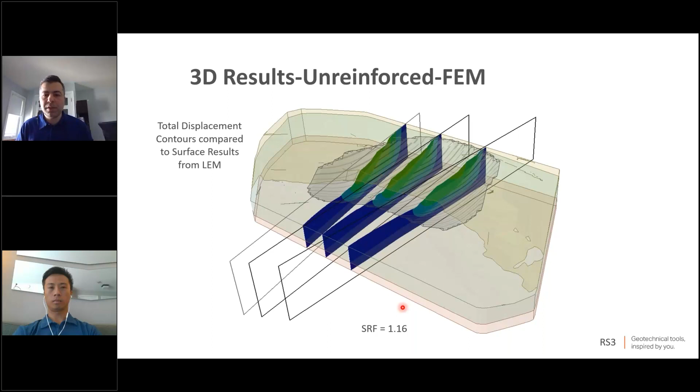That easy. So I ran the 3D finite element analysis, and these are the 2D contours. The gray region is the critical slip surface from Slide3 software. If you look at these contours, you can see that they match perfectly between 3D finite element and 3D limit equilibrium. We also got the SRF of 1.16, exactly the same as Slide3. As I mentioned, if you use proper search methods, you should get the same answer in finite element analysis as well.

Then we added the support pattern based on our 2D pattern. Again, we used the case with 2.75 inches of soil displacement. There's no integration between Slide3 and RSPile, but you can get the output of RSPile and define a user-defined support type in Slide3, importing the output as user-defined properties—distance and capacity. We got the information from RSPile and imported it to Slide3. We defined the pattern as a horizontal spacing of 24 feet and vertical spacing of 40 feet, the same pattern as in the 2D model, and created this reinforced model.

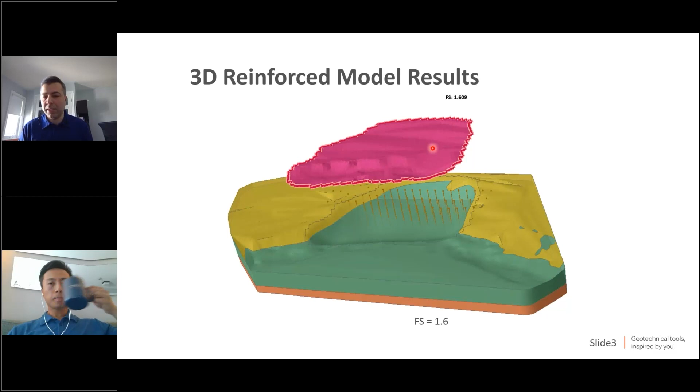If you look at the results, the factor of safety goes up to 1.6. In 2D, it was 1.55, so it's higher but not by much—just a little bit higher than our 2D case. If we bring the slip surface up, you can see these reinforcement supports have intersection with our critical slip surface, intersecting most of them.

So as a summary, we found the capacity for different soil displacements in RSPile and imported them into our 2D software. For 1 inch, we got a factor of safety of 1.3. For 2.75 inches, we got a factor of safety of 1.5 in Slide. We took this second case to RS2 and got a factor of safety of 1.5 in 2D, and then we imported the same case, created a real 3D geometry, and got a factor of safety of 1.6—which all match.

If you have any questions, feel free to ask, and we're going to come back and answer your questions. Thank you.

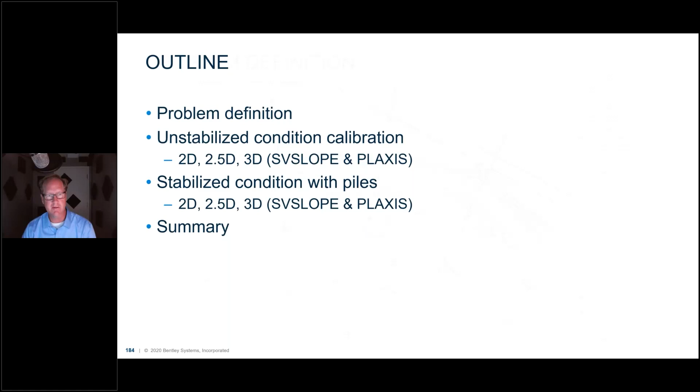In terms of the analysis tools, we're going to compare SVSLOPE, which is a limit equilibrium product. There's no deformations considered with LEM. SVSLOPE can be fully coupled with finite element seepage analysis and stress, as well as Plaxis can. We're taking a different approach with Plaxis, FEM of shear strength reduction, so we're weakening the soil until the piles incur a moment and shear stress maximums if they do. We can model the piles by either elastic or plastic response. Just a reminder that with this method, we get deformations that can largely be considered fictitious because we're artificially weakening the slope.

If we move forward and look at the unstabilized condition first, to calibrate it, really what we're trying to do is determine what material properties, drained or undrained, produce failure. We're going to assume the water table is correct at this time and assume no trigger mechanism.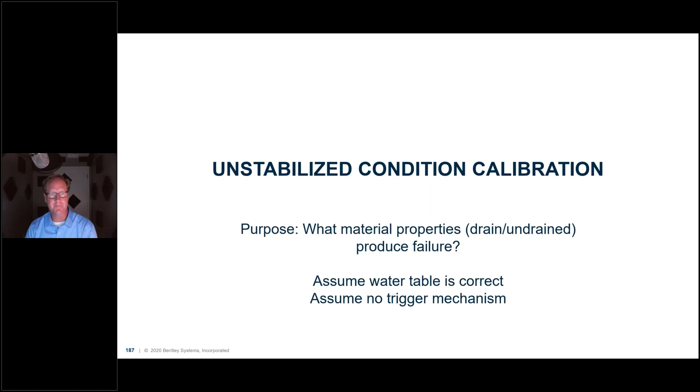Here are the material properties for the different materials on the site that were provided to us. Just note at the Huot formation clay, we have both drained parameters, friction angle of about 15, and undrained parameters of about 0.22. For the pile, we were provided just the compressive strength of concrete and the rebar pattern in the pile itself.

So I first went to a consultant friend of mine at a consulting firm, and he had a spreadsheet. He plugged in the numbers, and we came up to about 9,000 kip feet for moment capacity, and shear capacity of 694 kips. We wanted to be a little more sure about this, so we plugged the numbers into the Ram Elements Bentley structural product and built the pile with the rebar and concrete in the product, and came to a moment capacity of about 12,000 kip feet and approximately 1,200 kips shear capacity.

As a side note, we could also rebuild the pile in Plaxis and analyze it with no rebar, and we came up to about 7,700 kip feet of moment and 1,300 of shear capacity. So this brings out how you actually analyze your pile capacity in terms of shear and moment capacity. There's a little bit of variation on your methodology, whether you look it up from charts or whether you analyze it in more of a structural package or what you do. So let's move on here.

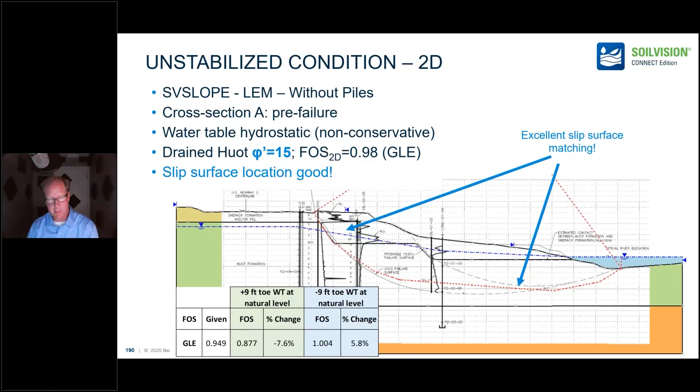And we were able to do that. We have a new feature in the software where you can flip the geometry from SV Slope to Plaxis and back, so it's very easy to transition between the two software packages.

And so we'll keep going here. Just as a note, what we did for interest's sake is we took the 2D profile, and you can pull it out in SV Slope and extrude it in the third dimension. So it's not representing realistic site conditions, but you are improving your failure surface from modeling basically a cylindrical type of 2D failure to modeling an ellipsoid in 3D.

If you do that, keeping the water table the same and everything else the same, basically you get a friction angle in the drained analysis of about 12 degrees, which is a 20% reduction in the friction angle to keep the factor of safety still at 1. So just a note, and the location of the slip surface was still roughly very similar here.

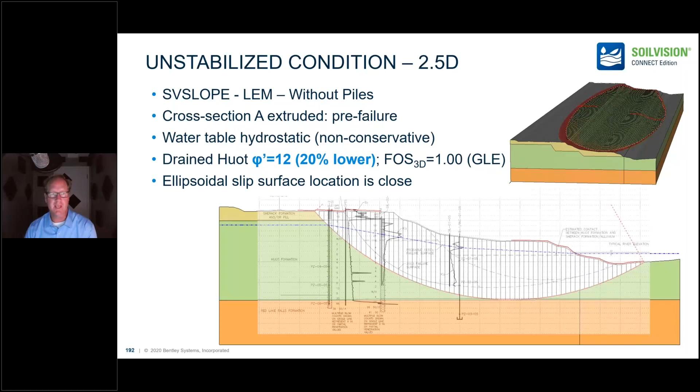We took a cross section down the middle, sliced through the failure. Just a note that these models, if you have a back analysis and you know the location of the failure, you should be modeling these as 3D because they're non-conservative if you just do a back analysis in 2D.

So then what we did is we built the problem in 3D for a further, a true 3D is what I would say. And how we did that is we took the 3 profiles, we digitized them out of the engineering report, and then we used a new tool in the software to essentially stitch the profiles together and find common points and put splines between the profiles, so we get a little bit more realistic 3-dimensional model.

And then we took the original ground surface. There was a little bit of discrepancy, is what I would say, between the different topologies. Using different methods, you got a different surface, but we put this in here.

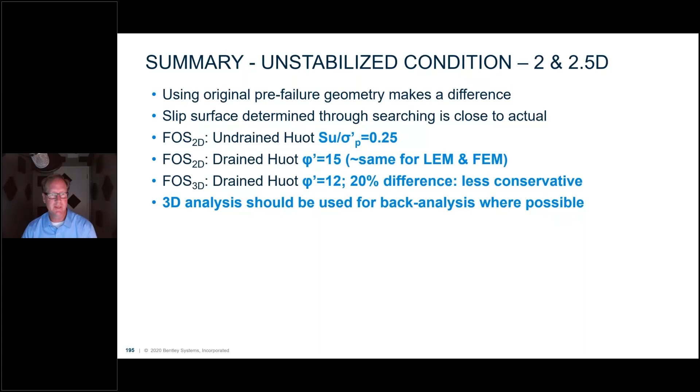The undrained parameters can be seen below for drained and undrained. Again, just to highlight that we should be doing back analysis in 3D, because otherwise you see the danger: if we do it in 2D, we're getting an overestimation of material strengths, which can happen if you then use those higher strengths to design your remedial solution—you're overestimating the actual strengths that have been noted on the site.

So 3D analysis should be used for back analysis where possible, where we have data. If we want to move forward and look at the stabilized condition prediction, and look at what factor of safety a reinforced solution will produce, we're going to assume the water table is correct as provided to us and is non-artesian.

As mentioned, I won't spend a lot of time, but this problem is uniquely complex in that there are a lot of potential failure mechanisms. Your pile can fail in shear, it can bend in moment in multiple locations depending on the geometry and the stresses in the system, clay can deform around the piles leading to excessive deformation, or the pile can push over. These are very hard to predict, as Ben brought out ahead of time—what the failure mechanism might be. And that's why we have great software to analyze this.

So what I'm going to do is walk through this simple to complex, and just start simply, moving to more complex models. If we just analyze this, set this up in 2D with limit equilibrium in SV Slope, we actually get a small surficial slide, which is also replicated in Plaxis down by the river.

It's worth noting because it's actually real and it is a true minimum. However, we're not considering 3D analysis or unsaturated shear strength, so likely that's why in reality it hasn't failed down here, but it's something to consider anyway.

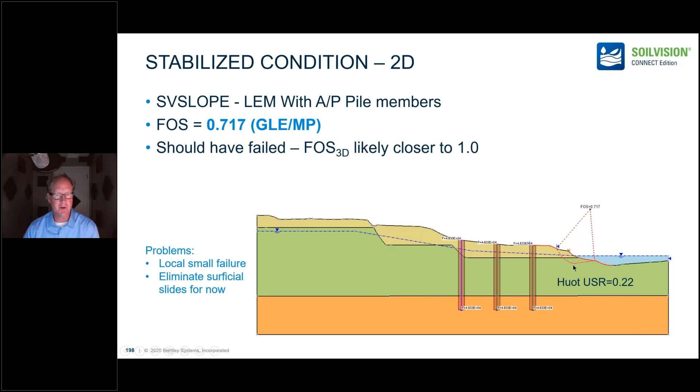So what we tend to do as engineers is eliminate that because it's not a high volume, and you can just tell the software to largely ignore it, which we did in future analysis, but it's worth noting. So we eliminated that small surficial slide.

You get the larger slide that we're more concerned about, in terms of through the piles. We've modeled all the piles as passive, and we've assumed shear failure in the piles, which, like Ben said, is an assumption. If we do that as a reference point, we get a factor of safety of about 1.55.

There's a slight inconsistency in that really you have to realize these 2D models are plane strain models that are set up—they are modeling a 1 foot thick wide section in the third dimension, and really we have 8 foot piles. So that came up in the discussions: can you truly model 8 foot piles in a 1 foot section?

What we realized when we set up the model is that we put in the full shear strength, or shear resistance, of the pile as if it was an 8 foot pile applied across a 1 foot section. So it turns out that that's a very reasonable way to pose the problem to the software, provided that you assume the piles are failing in shear.

As a small note, we also have active and passive zones roughly of this failure. You could argue that the upper pile is more in active failure and the bottom two are closer to passive. So we did that, and the factor of safety jumps to about 1.68, just in terms of interest. All of these are modeled with a pile spacing of 24 feet, and we still are not fully there, although we're moving towards a more accurate situation here.

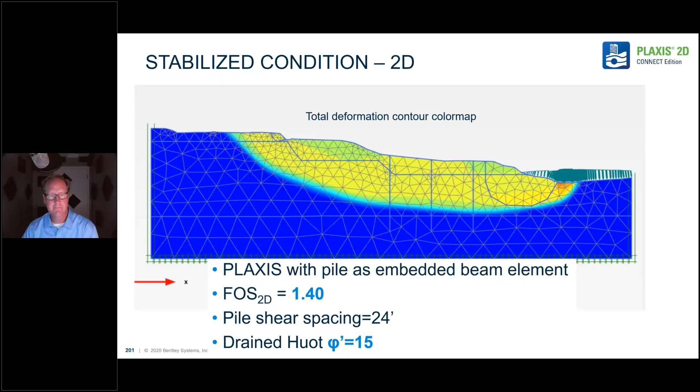So if we plot our factor of safety versus total displacement, here's the case for the original ground. We're about 1.12 in terms of factor of safety. These curves are interesting to note: if you model elastic piles, you get quite a malleable type of behavior that takes a lot of deformation, and you don't really achieve a plateau until very high deformations.

If we model with elastoplastic piles, the factor of safety drops from 1.4 to 1.32. You have a little more failure, but you're still around 10 feet here of total slope or toe displacement, which is the maximum displacement noted at the slope. So we've dropped from about 1.4 roughly to 1.32, given an increase in our ability to model the piles.

So let's keep going down here. And if we look at shear and moment, however, we're actually achieving—if you look at the bottom orange line, this is plotting the shear and the moment over the maximum. So really you've achieved failure once you pass 1.0 on this graph.

What it tells you is that you're not actually achieving shear failure till very high displacements, which are arguably large strain, changing your analysis. However, you're achieving the 1.0 roughly at about 7 feet here of total toe deformation. What this clearly shows is that moment failure is achieved before shear failure of the piles in this situation. So that is your failure condition. However, it is at a fairly high deformation.

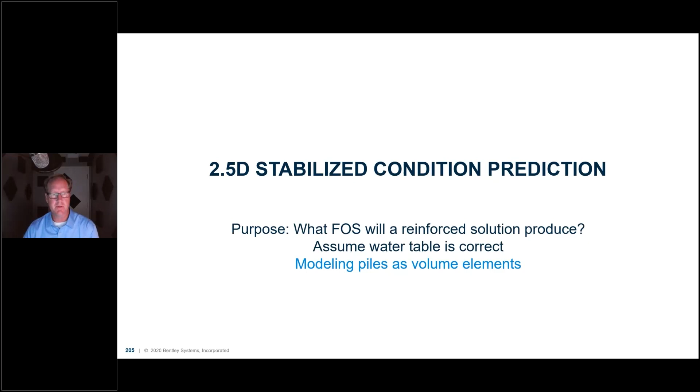So what happens if we now move to this scenario? First with LEM, what we did is we pulled it out in the third dimension, 24 feet, and modeled the piles as 7 foot by 7 foot square concrete with Mohr-Coulomb shear strength properties. So with specific dimensions, the slip shape is assumed to be very much like 2D. There's no shear resistance on the sides of the slip, and the ellipsoid shape is set to be very extensive in the third dimension.

So really what you're doing here is creating an analog to a 2D analysis, only we're increasing the accuracy of modeling the pile dimensions. Not surprisingly, the factor of safety produced with the 3D analysis is almost identical to 2D, which essentially proves that your 3D is consistent and a good representation of your 2D analysis going forward into 3D. But again, to criticize this analysis, you're still assuming shear failure of the piles. Only now we're getting more fancy with it.

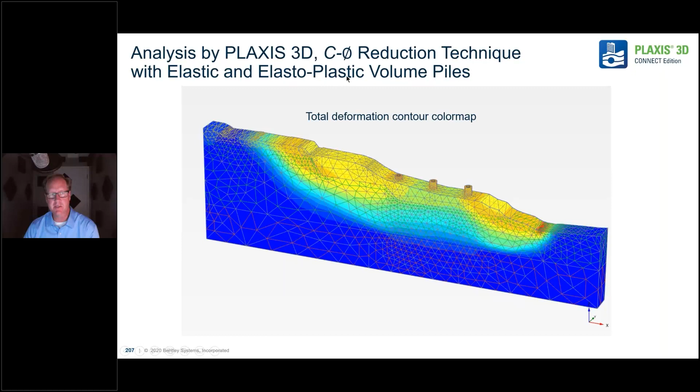So if we model this now in Plaxis, we can start representing the piles as volume materials with interface elements and putting in rebar, representing the pile and soil structure interaction in more detail. We can model the piles as elastic behavior or elastoplastic volume piles in this case. Our shear strength, our slip surface is still largely the same as 2D in this case.

So if we look at this graph, I find this interesting. Here is our LEM analysis, 1.57 for comparison. If we model the piles in 2.5D with FEM, elastically, we get about 1.58, which is almost the same. Here is our original factor of safety with unreinforced ground at the bottom, 1.13.

And here, if we model the piles as elastoplastic, what we have is a peak coming up at about 1.5 feet, and what you're essentially watching is the first pile failing. Then this next hump is the second pile going into plastic failure by moment, and the third pile. Then you stabilize as you deform more at a factor of safety of about 1.37.

So you're able to—because you're weakening the soil, you're keeping the pile strong essentially here—note the progressive failure of the system. Very interesting. And this just shows a visual of the piles bending over and getting where the plastic hinge is, which is about 14 feet down into the bottom Red Lake Falls formation.

So you can also plot in Plaxis the moment diagrams and shear diagrams, maximums for the piles at any depth. Let me bring out a few things.

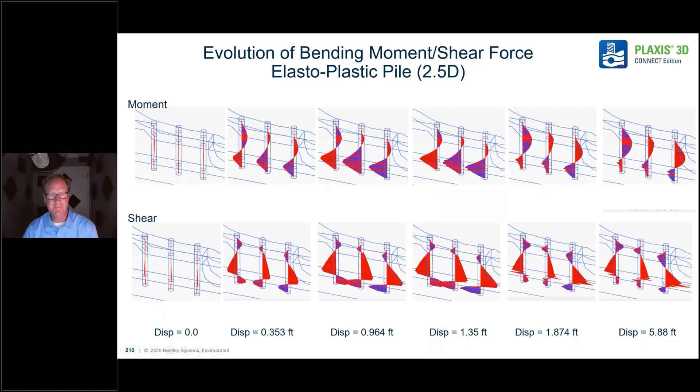And here you're seeing the shear down in the Red Lake Falls formation, maximum shear, developing differentially in the 3 piles. Interestingly, in a scenario like this, you'll have different responses from each of your piles depending on where they're located spatially. You can map that through with the Plaxis software, and that's one of the benefits - you can model the detailed soil structure interaction.

So if we plot again the moments and shear in terms of capacity at 1.0, you can see we reach moment capacity of the piles at a deformation of about 1.5 feet, and we don't really ever achieve shear failure of the piles. So just like Ben theorized in his first presentation.

So if we look at 3D, what does a factor of safety produce and how is this different? We're going to assume the water table is correct, assume no trigger mechanism. If we do something simple first, we pull it out in 3D. The advantage here is we're improving the shape of our slip surface.

SVSLOPE has the ability to search both elliptical and fully non-elliptical shapes in 3D for slip surfaces. You're seeing that shape develop here in 3 dimensions, with piles placed every 24 feet along this extruded problem. So improving your representation of the slip surface - you jump up to about 1.8 from about 1.55.

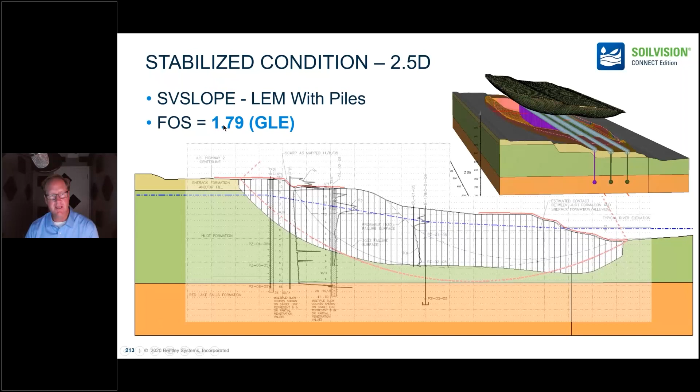We're just simplistically changing one thing at a time. Now if we take the full 3D problem - what we did is extrude it, building it with the 3 cross sections, using splines to stitch it all together, as I showed you earlier. This case is a little different because we're using the real field data.

So you have artesian conditions down near the toe of the slope, and we're putting in the piles. We swept the piles through here in an arc, 3 rows of piles - you can do that automatically in the software. We put them down to the noted depth, gave them pile shear strength, and set this up assuming shear failure. It's noted the geometry wasn't perfectly complete for this site, so we had to make some assumptions in terms of the range of data.

We ran a multi-plane analysis and searched across the slope, and interestingly it converges to a non-elliptical shape with steeper side slopes - it did that to try to avoid engaging more piles on the edges. So it's performing very adequately. It was also moving a little bit to the right in terms of the most critical location, but you're at about 1.9 for your 3D factor of safety in this case.

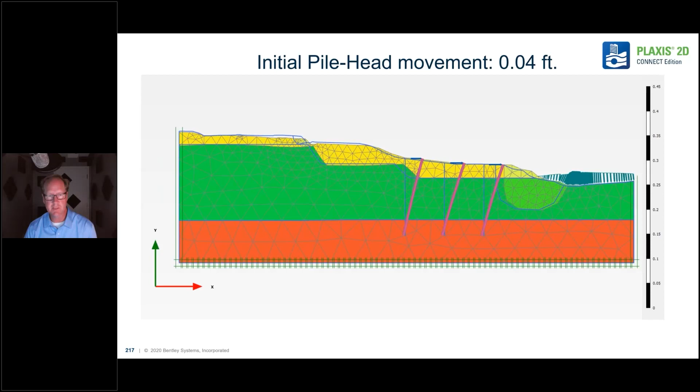There's marginal impact on your factor of safety from starting from a deformed case as opposed to starting from no initial movement. So it affects your deformation criteria for field performance, but not your factor of safety in a big way.

So in terms of a summary of what we found through this interesting study, with pre-existing conditions, your factor of safety is 1.12 in both LEM and FEM. If you do a back analysis, you can determine properties for drained and undrained conditions. If you do a 3D analysis, you're getting about a 20% reduction in your material properties in this case. So just to answer some of the committee's questions that they provided to the analysis group.

What failure mode is controlling? Really, moment or flexure failure of the piles is controlling. What is the computed stabilized factor of safety? The values range really between 1.37 and 1.89, depending on how you analyze this situation, and it's really governed by the moment.

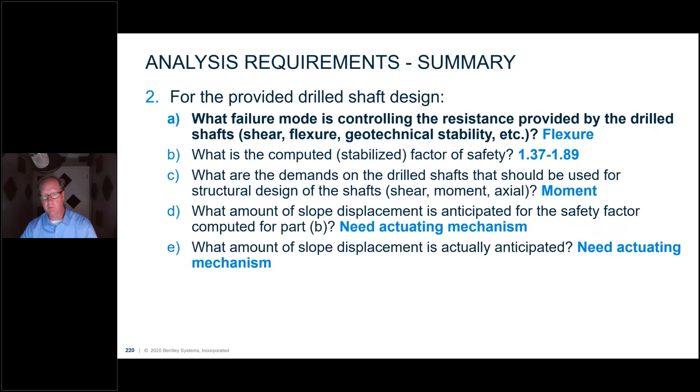And what amount of slope displacement is anticipated for the factor of safety computed in Part B? This should be roughly 1.5 feet, the approximate deformation. However, we just have to realize that that's fictitious. What amount of actual slope displacement is actually anticipated? You would need an actuating mechanism or some kind of stress change - you need to push on the slope, lower the water level, do something like that - to compute an actual field displacement.

So in summary, 2D material properties back-analyzed are non-conservative. We can improve our analysis going to 2.5D. 3D analysis improves your model, your accuracy, and your model insight in this case. Deformation analysis - you must assume a deformation in this case in the absence of a trigger because you have no stress change. So it's a difficult modeling scenario.

And I would bring out - this is interesting, I find, to summarize like this. As Ben suggested at the start, if we go from LEM to FEM where we're including detailed soil-structure interaction with piles, we note about a 12% reduction in your factor of safety overall. However, if we go from 2D to 3D, there's about a 22% increase in your factor of safety. So you have a net increase.

There's also a case to be built that we should be modeling these things in 3D as opposed to 2D, because we have a bigger potential impact on our calculated factor of safety. And I think the ultimate analysis in this case is really going to a 3D FEM where you're including all the soil-structure interaction and the piles and the moment of every pile in the analysis. We didn't have the time to go there, but this would be the ultimate analysis to pursue in the future.